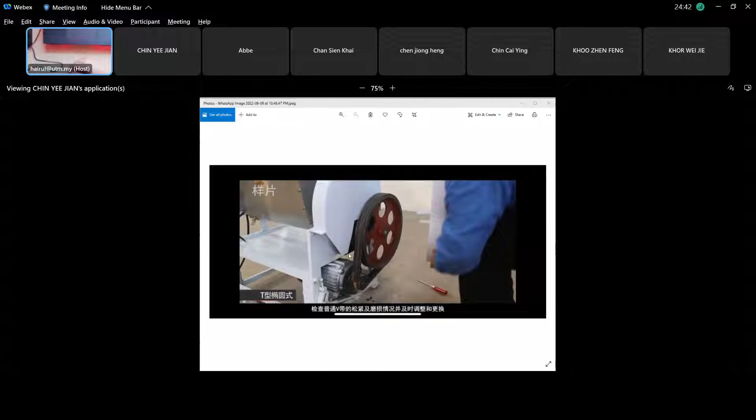Okay, if you look at this sample product in the market, anything from China, this one is normally a food mixer to make dough. So is this one a dough maker? Is this machine a mixing mixer? They are trying to make a dough-making machine. Yes, we found the dough mixer machine.

But there are many choices, since one does it like this, the other one just has 2 gears. So we think this is more suitable and maybe more economical and efficient, because they are cheaper compared to the 2-gear one, right?

Yeah, but be careful. Yeah, you are right. What you said is right.

But sometimes it depends on our normal design class. Look here, look here class. Can you see my live video? What you did, your background is right.

You study this part of your design process. First thing we have to make a background study, right? But sometimes can you create a situation - can you see my live video or not?

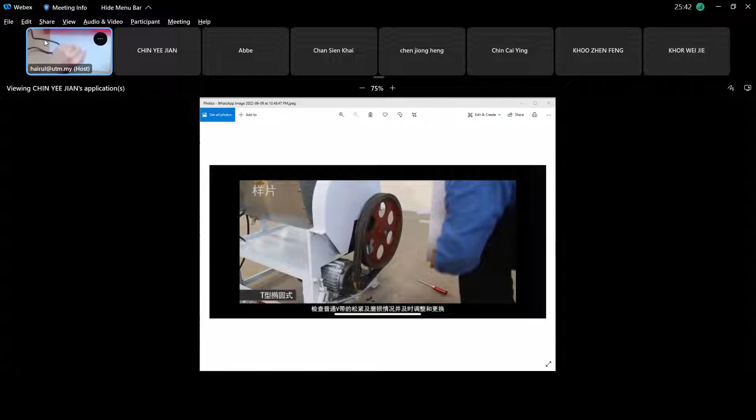Class, can you see my live video? Hello class. Yes, can see it. Okay, sometimes in a project you make a list.

Okay, you look through sample products in the market, but you don't know actually how much capacity it will carry. I'm not talking about power capacity, I'm talking about capacity of the production performance of the machine, in terms of the volume flow rate - the performance of this machine.

The performance of the machine is in terms of how much quantity of dough they will produce per minute, I'm not sure how they define it. Understand what I mean? The capacity of this machine - how much dough it can produce, how many liters, for example. If liquid you call it liter, if granular you can also call it liter, but if dough, between liquid and solid, is it measured in grams of dough or what?

So you need to be certain of the spec - the output speed, the performance of your machine, what we call the capacity in terms of volume per minute that you can produce. That is also quite important, so you can decide with your group, because you don't know how much the size of your container or mixer should be.

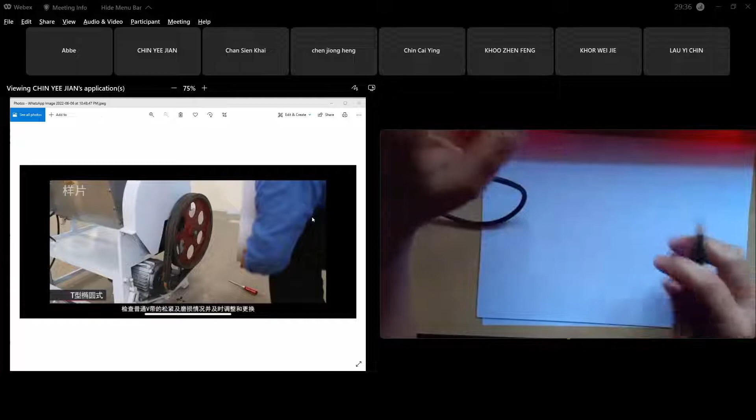So you need to be exact. It's good like that because I want you to look at it as an engineering consultant would. From there, you try to make - usually your customer, for example, let's say it's Nestle. Nestle wants you to do their food mixing machine for their production line.

For example, like Yijian, your case is a dough making machine. Your company is not necessarily - okay, I change it to something, a very famous baking company. One of their production lines, they want to make a donut. One of it, they need to make your dough.

Your dough will become, at the end, after your machine, one module. The next module of their production line is another process to make the donut. So your machine's job is just to produce dough, a quantity of dough.

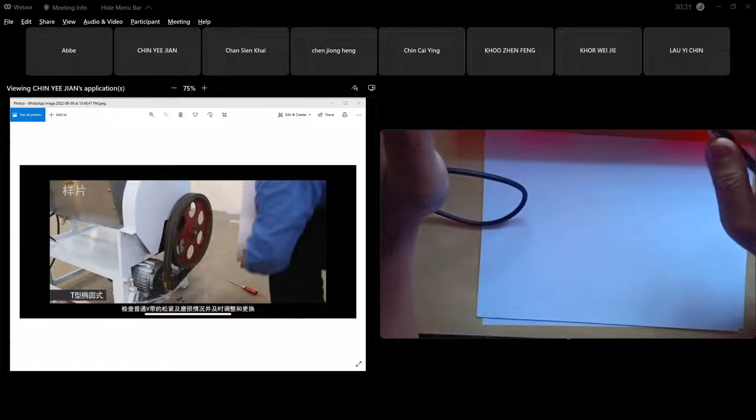Understand, Yijian, are you listening or not? I don't want you to do a lot of research, just a simple thing - I just want to create a scenario. Yijian, are you listening or not? Yes, doctor. Okay, for example, your production line is making a donut.

You need to identify: main dough for what? Dough can vary - dough for bread is different, dough for donut is different. Can you focus on one thing? Maybe your dough making machine, for example, they want to make - let's say we focus on donut.

Our dough machine does not produce the donut itself - our machine's output, as long as it becomes dough. So the amount of dough is enough to make their production. Okay, you create a kind of station.

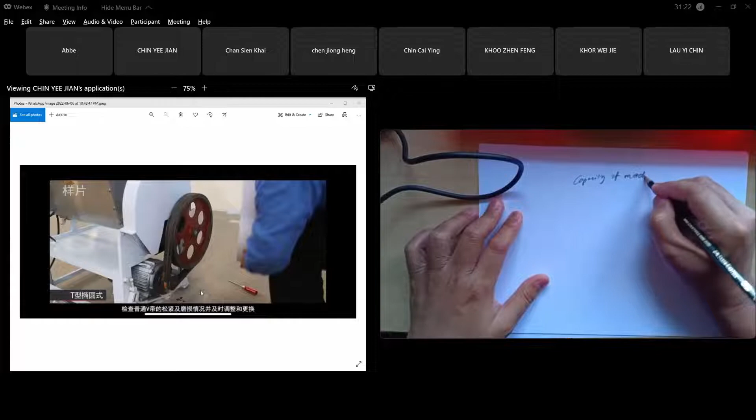So what my point is, your customer will ask you: okay, their production line, what is the capacity? Capacity of the volume, capacity of your machine, capacity called performance - performance of your machine. Performance is like when you design a sports car - performance is your speed, your fuel consumption. For this kind of machine, your capacity of performance is how much it can produce per minute.

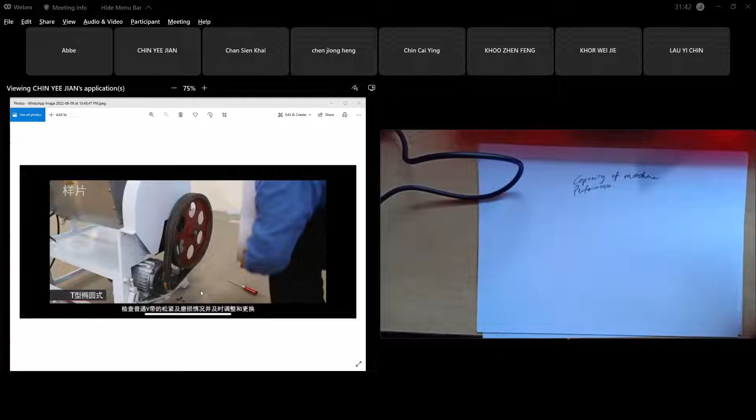So from there, you can identify the size of your machine. Then your customer will ask you, because there is their production line, they have their zone - what I explained to you guys is just to guide you. They have some kind of size limitation.

Because this is your machine - before your machine is the dough making, it's a food mixing machine. Dough making machine, food mixing - we consider it as category food mixing. Before your machine, they have another production line. They have production line A, production line B, and yours is C. C is dough making. Maybe before that is A.

Maybe do it manually, come to your place, then go to another place. And maybe they have a kind of size limitation for your machine too.

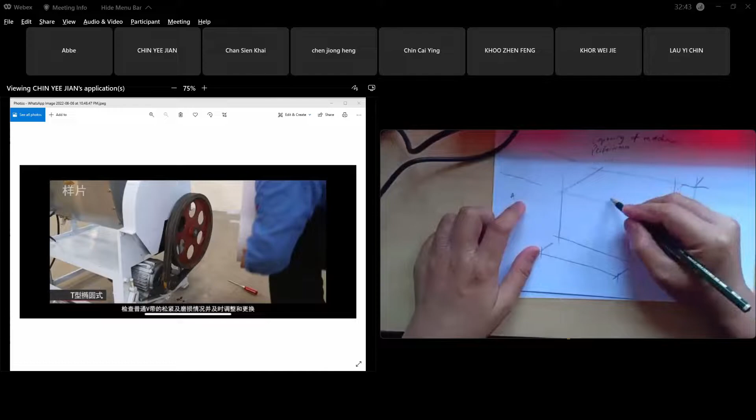Your client will ask you, okay, your machine will be mounted on their production line, and what's your occupying space? Limitation, size limitation. Occupying space is like this - this is the length, width, and height. So this will be the limitation of the size of your machine.

I'm not just making this up, I'm telling you to explain the real scenario when you do a design project. Occupying space - so can you, you and your group, Yijian, the other group also, identify what is the occupying space of yours.

Because later when you design, you simply say okay, I want to use V-belt and pulley, we don't want to use spur gears. But you haven't decided, you don't know what your machine is all about. You've decided too early about what is your power transmission. Hold on first - we want to know what type of machine.

Okay, for example Yijian, for example your client is a bakery company. So maybe they will give you signal based on their engineer there. The engineer will inform the engineer of that baking company - this is a big baking company, consult, you are engineering consultant, will do automation, design machine from there.

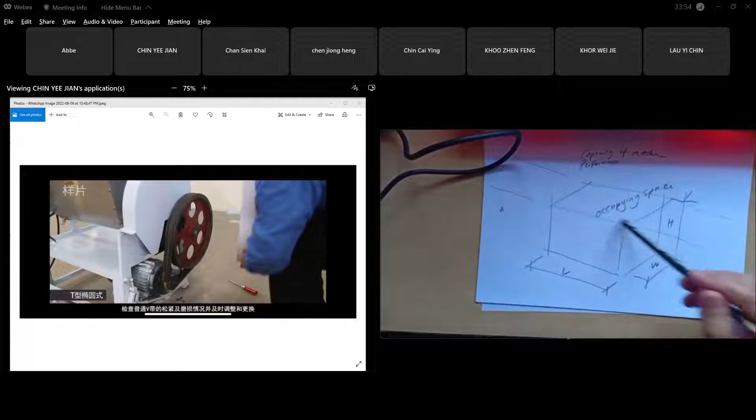So the engineer there will tell you the occupying space is not more than this, because they want to mount your machine into their production line. So my point is, can you guys - you look, you don't know, I don't know, we don't know the size. You can look from the internet about the overall size. To define the size, you just guess - maybe this one is 1.2 meter, who knows, and this one is 0.9 meter, this one is 1 meter height.

That is your total volume. So it's good like that. So you know your bounding box of your machine, to make sure that your machine will be not too small and not too big. So this is your limitation size. So you try to occupy this space. Understand that, class?

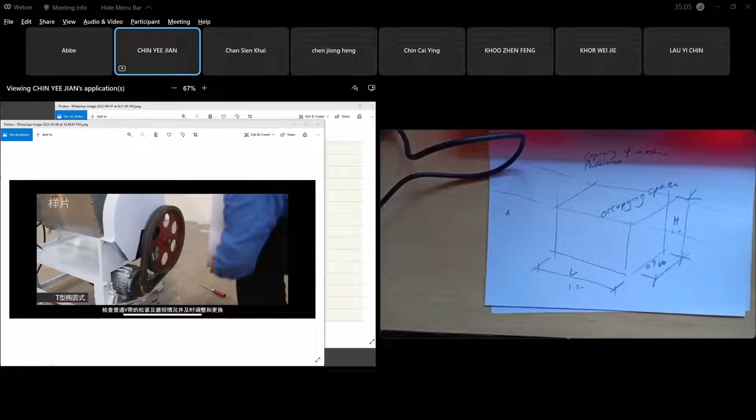Class, are you listening or not? Yes, Doctor. During Doctor's discussion, actually my group went to find some information about the dough machine running speed. We found that different liters have different mixing speeds. For example, if there's a 5 liter, then the beater process has 131 rpm, something like that, Doctor.

You have it, Doctor, special - can check here on the screen. I've already shared the screen. Here is the specification, and Doctor can see that. Wait, Doctor can see that during 5 liter, if the container is 5 liter, then the mixing speed is about 131.

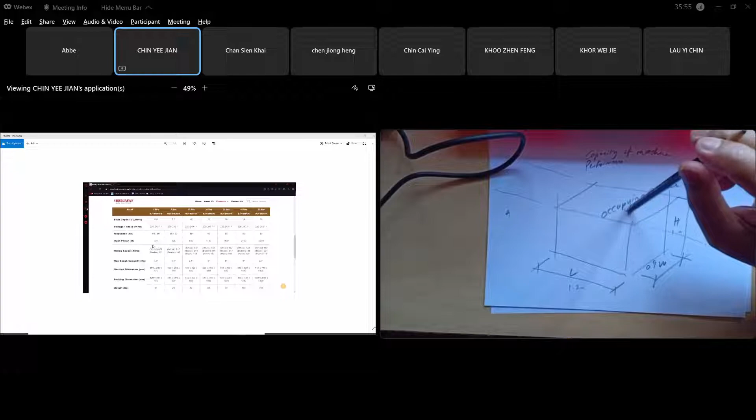We should focus on one only, because if we focus on two there's quite a problem. There's 152 for the whisk process and 131 for the beater process. I believe we need to use a lot of gears if you want to change the speed. So something like that, and the input power is 300 watts.

So maybe we will try to find on Alibaba to search the electronics. You have a lot of variations in terms of the model, right? So you need to focus on one. Which one do you want to go for, 5 liters?

Sorry, Doctor? Various means the whisk process - you have a lot of choices here, so you want to select one. My point is select, so focus on one. Okay, select one speed only.

Okay, but of course the frequency, something like that, we don't care, right? We only care about the input power and the mixing speed. And the bottom one is used for us to sketch, right? Something like that, Doctor.

Yeah, okay, right, so what about the size? Size actually, I think it's 5.5 liter. Maybe we choose this one, the 5 liter one, and then the machine dimension should be 350, 230, and 400. I think this is enough for the commercial product, because it's sure here.

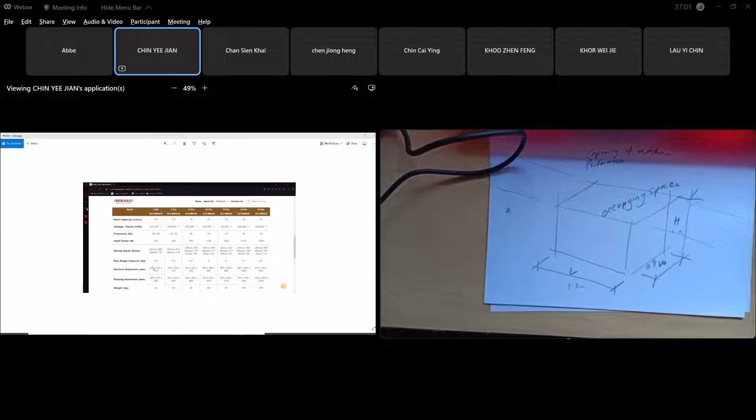It definitely means that his product is like this, right? So we just follow him and we got a reference, something like that. All right, okay.

Okay, yeah, you are right. What you said, okay, this is part of your research. Okay, this model is already in the market. Okay, this model, we have two categories. Okay, I understand you can do it like this also.

Okay, but sometimes in design consultant, we are looking at making research on the current product in the market for dough mixer machine. Dough mixer is there because they make it commercial. But what I'm explaining to you is not about commercial machine. What I explain to you is about more on your design, your custom design.

Sometimes industry is like that, because industry sometimes has automation in terms of production line. As a design consultant, I'm talking about you doing design consultant, you are a design consultant company. This kind of what you have learned from this course, you can apply when you, after you graduate, become an engineering consultant. You and your friend form a company. This part of your work is doing automation.

Okay, what I'm talking is more on custom design. Do you understand what I mean? What you do is right, okay, you look on the current. What I'm talking, sometimes we can create this question. I'm talking about the real thing.

But in production line, for industry, sometimes we go like industri kerepek - industri memproses kerepek ubi, contoh industri memproses jagung. These are the food products they sell in the market, kerepek ubi. Because they need machine, normally their workers do labor and manual process.

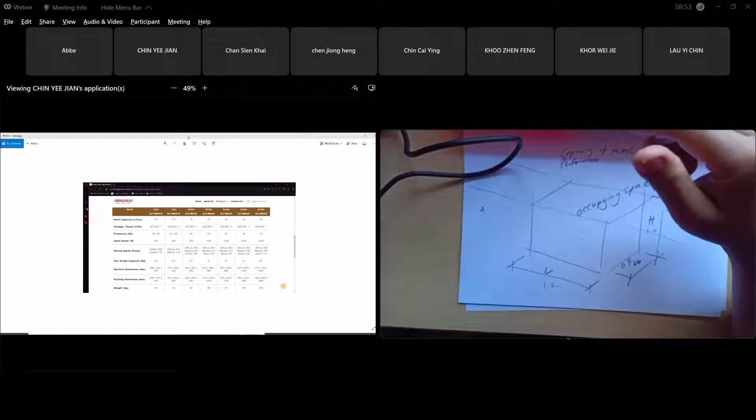They need labor. This kind of customer, this company, will hire a design consultant like you, like what I am explaining. They will explain to you, okay, your machine - sometimes they give you theirs, even big companies honestly, sometimes the machine you do is not based on what's already there. If it's in the market, we simply buy, we don't have to do this. We can simply buy, but what you did is good, you can do this as well. I didn't say I have no argument on what you explain, Ijan. What I'm talking is another story.

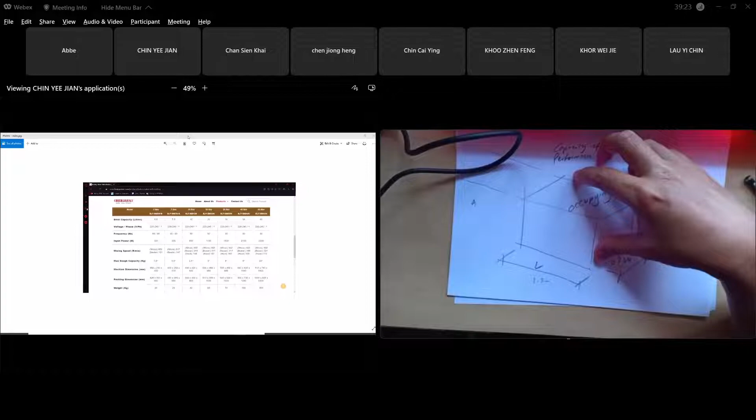So sometimes your customer will define, so your machine too will be a custom design. So your machine has to be your own build because you build your own power transmission. Okay, what you did is right, you look at what is existing there.

This company is commercial. They already make this product for food industry. So they sell their product, this dough mixer, to be mounted on. Any company wants to buy, food industry company wants to buy it, or even domestic.

So maybe in something like this, maybe we can follow the model because there's a 5 liter, 7 liter, 10 liter, and there is a mixing speed and input power. Maybe we can follow these three things. If we use 5 liter, then we use input power 300 watt, and the mixing speed is 131 run per minute. But the designing we base on our own scenario. Is it okay like that, Doctor?

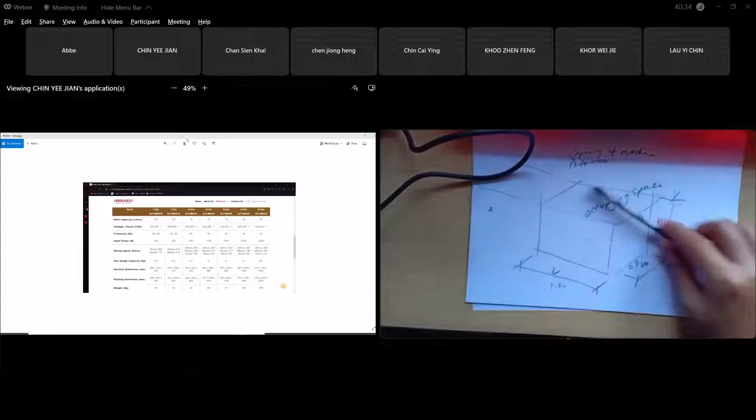Boleh, okay. Another thing I'm talking about, sometimes customer, when you do, the customer will give you what is the volume, that you have a limitation of space. So it means you have to make sure when you do your design - that's why I need to see all of the group's sketching, I want to see what is your overall size of your machine. That's the first thing, overall size of your machine.

So for the overall size of the machine, normally what we simply do is we need to make research. What you did, Ijan, is right, one of it. What another story I'm talking about, sometimes industry, customer requirement - this is what you got, your customer requirement. They'll ask you to do, okay, this machine about this size.

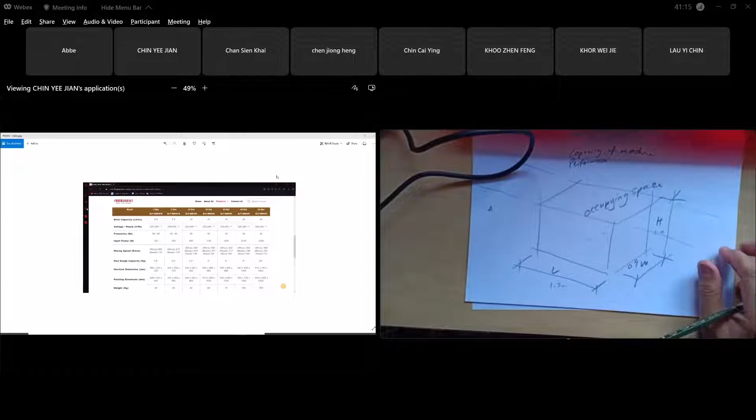Sometimes you have some issue, because if you just simply design a machine, sometimes is it suitable? Is it suitable at the place, at your client's, your customer's place to mount it, maybe based on their production line. Sometimes like this, we look at their production line, how it is. Sometimes they give you the limitation in terms of space. So this would be your first constraint that you need to follow.

There's a limitation that you need to obey. So my point is, you make a sketch. Once you know the overall size of your machine, like Yee Jian's example, okay, what you did is look at examples, or you guys can also look on the internet for what type of mixer.

For example, if other groups don't have this, don't follow the same. Different groups should go for different, make it interesting, food mixer. Say you want to make a beans mixing machine, beans, maybe coffee bean, I don't know, to make a product. So you make research on mixing, to do something, mix.

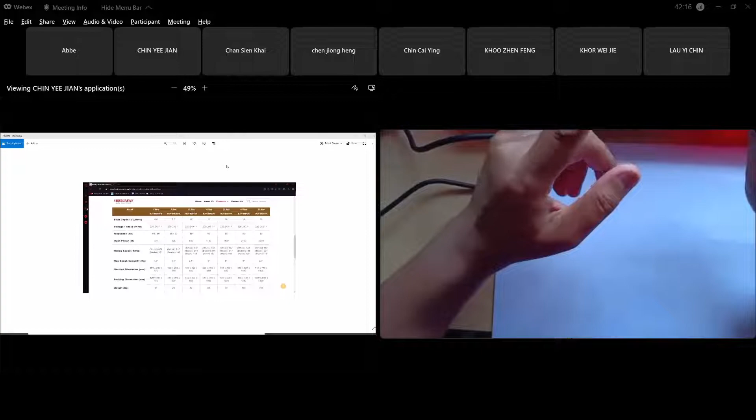Beans to make a powder. If you say beans become powder, that one is a grinding machine. You must be careful, whether it's grinding machine or food mixing. You need to justify it. I'm talking about food mixing machine.

So you have to decide what type of food mixing. First, you know the overall size of your machine, and then you will decide. For example, Yee Jian, yours is a dough mixer, right? Dough mixer. If you make research on the internet about the dough mixer,

they really need it to make a dough accurately at this speed. If less than this speed, it cannot form the dough properly, the mixture content will also affect the quality. It means the dough is too soft, or maybe too hard. Maybe the food technologists will signal to you, mention to you, you are the design consultant.

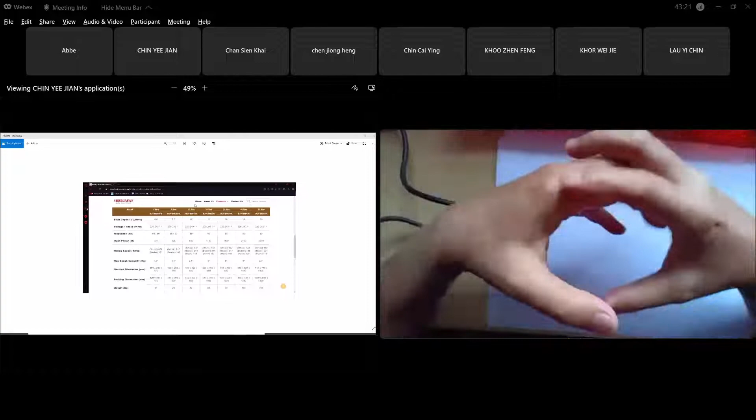The food technologists, not the engineer, talk about the speed. They say you only have to be fully automated. The engineer from that company will tell you, but you are the design consultant. The food technologists mention to you that the dough quality needs this speed. If too high or too low the speed, it will affect the dough quality. So you got to be careful.

Okay, it's quite fast because I'm just assuming about 60, so 131 RPM, so it means you have to make research, does it have to be accurate?

If you want to go for 5 liter, 5.5 liter, if you say it needs to be exactly 131, sometimes you can go to 130 and you need to justify it, because as I told you, if you want to remain accurate in terms of constant velocity, I'm talking about constant velocity, we go for spur gears.

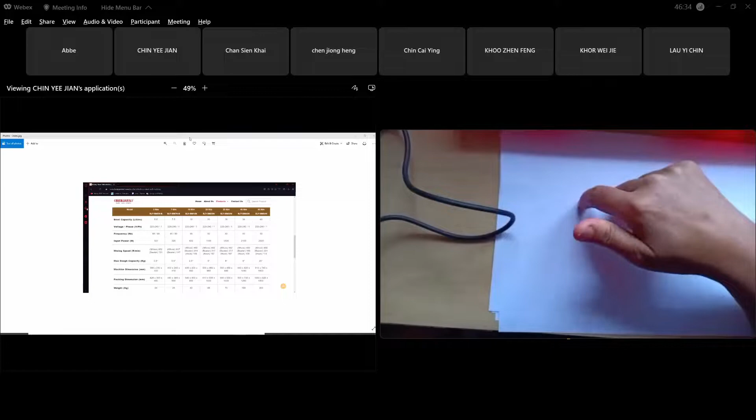Their dough making machine needs to be precise, that's why they use gears instead of pulley and belt. They justified it to me, the group explained to me because they did research that their dough mixer needs to produce this dough.

They create a station, that's good, something interesting. They discuss with the client, they make research, they don't simply talk. This dough has to be at this precise speed, exact speed, to be precise and have high efficiency. A precise machine has higher efficiency, so that's why they use spur gears. I agree, I'm convinced they're using gears.

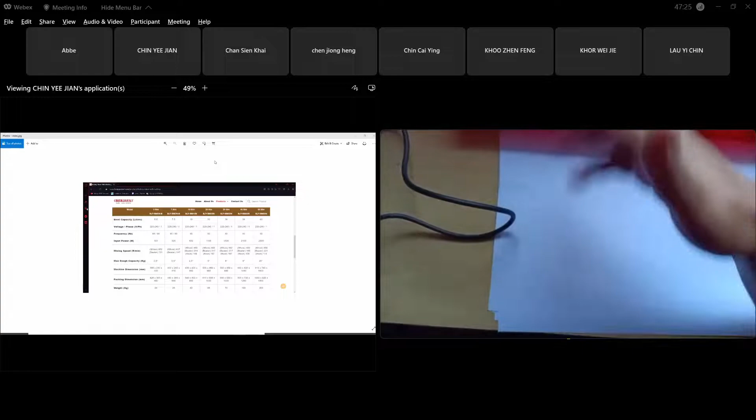They have 2-3 shafts because of the long center distance: input power from the motor, then another middle shaft, and the output shaft. So they're using spur gears, like you Yee Jian using pulley and belt. Okay, I have no argument on that. So you justify it, if your expectation is around roughly that, you justify it in your report.

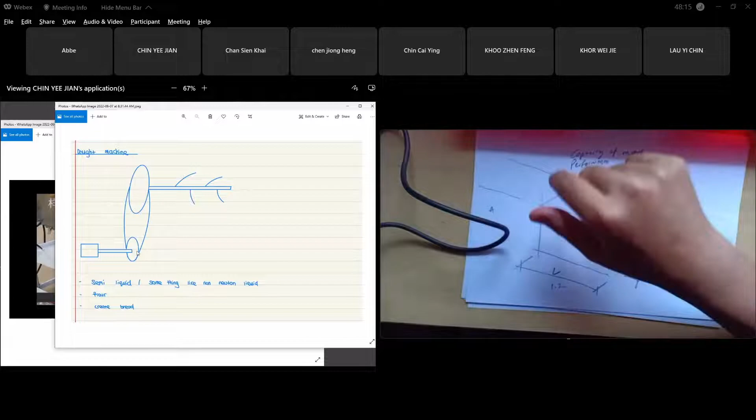Too fast to discuss the power and the location of the shaft. Too fast, hold on first. Just draw the dimensions inside. We need to determine, put some scenario inside first, and then follow up with discussing the DC motor per minute, shaft length, something like that.

First, the overall size of your machine, okay, number one. Number two, have you defined the speed? What was it just now? 131. Okay, 131 RPM, okay, you've discussed this with your group.

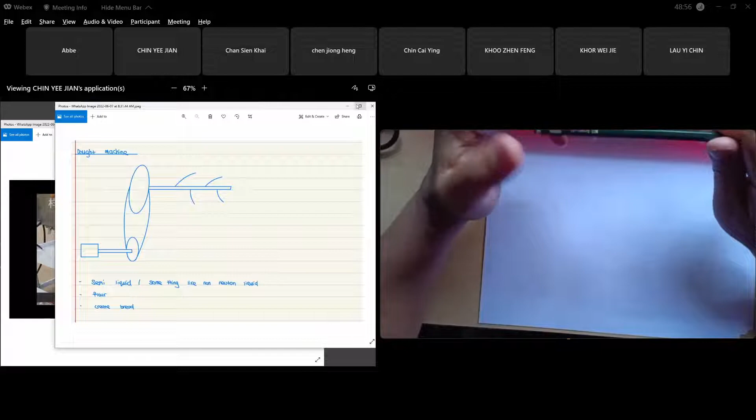Okay, what is the horsepower of your machine? That's the second step. What is the power of your machine? Is it normally electronic power, DC motor, something like that? The image you showed me just now, the table, a little bit confusing, what do I mean by that?

Power, input power, how much? 300 watt, okay, 300 watt, mixing speed is 131. So have you decided what motor you're going to use? We think maybe an electronic DC motor because there's only a single direction, no reverse or whatever.

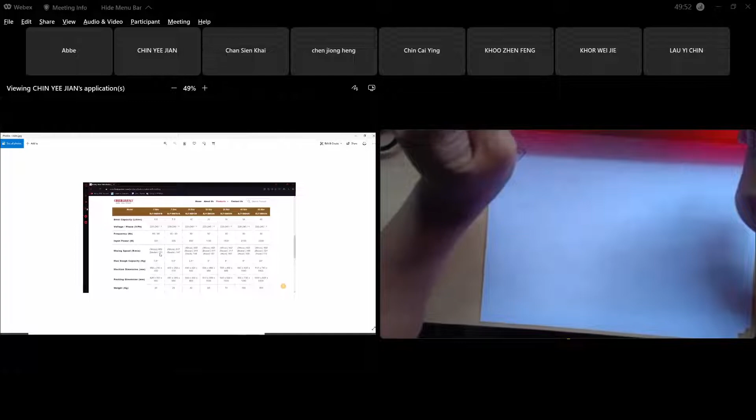So 300 watt, 300 watt motor, maybe. Okay, your speed is 131. Okay, your second step, you already know your overall size for your machine. You already have the image, the sample product, so this is already your occupying, overall size.

Okay, this machine, this step we need to do: you need to identify the zone of your machine. I think, if I'm not mistaken, we have two zones. One zone is the power unit, including your power transmission. The other zone is the mixing unit, that's the output of your machine. Right, class? Yeah, total.

Okay, you decide, sometimes for the power unit you make a block like this. Okay, this will be a block for your power unit, right? Okay, total, I'm talking about this as one way to do it. Better we go step by step, rather than straight focusing on the shaft you want first, then we design the layout of our shaft. So this will be your power unit, your power transmission unit, where the location of your motor and your shaft or pulley or belt or spur gears is. Understand what I mean?

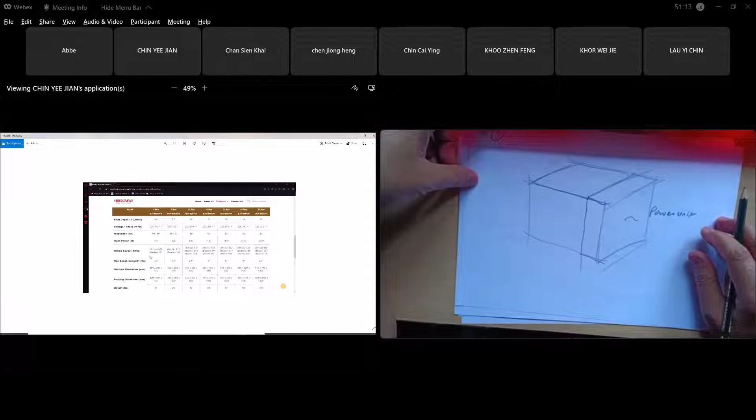Class, are you listening or not? Yes. So this one will be mixing unit where? You want below mixing unit or top mixing unit? Your mixer, where is it?

This is one way, the way I would do it with my group if I do it. This will be mixer unit, mixing unit, mixer unit is this zone, because we have a lot of machines. Of course, about this, you look at existing products.

That's it, so why do we need to discuss already there in the image, right? Now I'm talking, you don't have any idea at all. You want to build your own custom design, so you discuss, understand that?

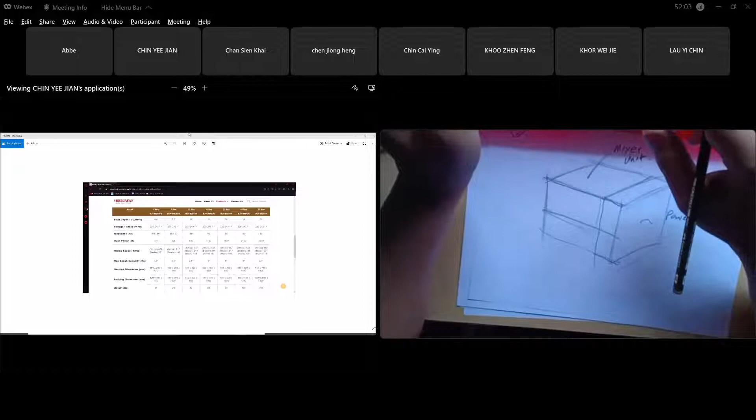About this, okay, you look need on existing product, that's a shortcut you know. Of course it will be. Sometimes when you want to make a food mixer, sometimes it's your own design, so you need to discuss. Of course, if we look at the image you just shared, it's like this.

Mixer unit, of course, here. So power unit, but you need to plan too. Rather than going straight to where the shafts are, don't focus on the inside first. We focus on the overall first, the overall machine, the layout of our machine, understand? So this will be power unit.

Our transmission unit, sorry, it has three parts guys. One, transmission unit, sorry, my mistake, this is my way, my opinion guys, my opinion. One more, we have power.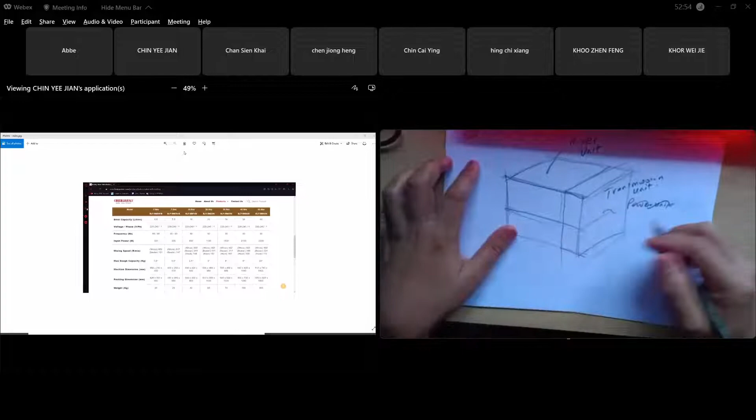Power unit, either you want to use motor or diesel engine, or engine, diesel or petrol, or do you want to use motor? That's how you do things. Or maybe you want to use solar power? Who knows, solar power. Nowadays we save energy, I don't depend on your machine.

I'm talking, power unit, where is the location of power? Power unit is the motor location. Transmission unit is your power unit, where is the location of your transmission unit? Number 3, what your machine will do.

Okay, we are mixer unit because we are a mixing machine, right? You design the layout, understand? You know what I'm talking about? The block location of this. Understand, class? Yes, it's clear.

But it's okay, you look at the image, everybody's talking, like before I gave my student a concrete mixer, of course they know, motor or not depends too, sometimes your concrete mixer has to be a special design, different, no, one of it you definitely look at the standard there in the market. But when you do consultancy, you build your automation machine like this, sometimes we're not buying standard machine, because in the market they sell their product like you showed me.

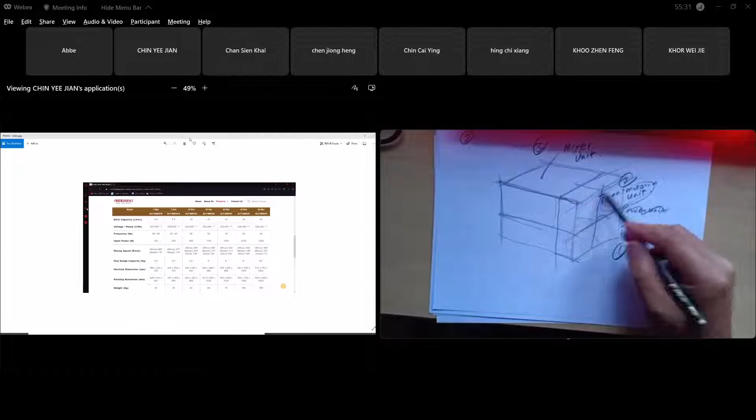So this thing you discuss, what is the location of your motor, what is the location of your power transmission, first power unit, okay, you use 300 watt, so where is the location of your motor, and where is your transmission unit, to transmit that power, how you design the layout, the location, and also the occupying zone, where is the zone, and also what is the location, your mixer unit, your machine will do.

First we need to arrange the dimension to the mixing and the power supply part. I don't want you to draw this block, I'm explaining to you the step procedure. So then only, okay, after that first we know the size, right, the size, length, rod.

As the other group mentioned, in case you don't have any reference for your design, this is how we do it. Sometimes when you search the internet, there's already a product in the market, and you might think why not just follow that.

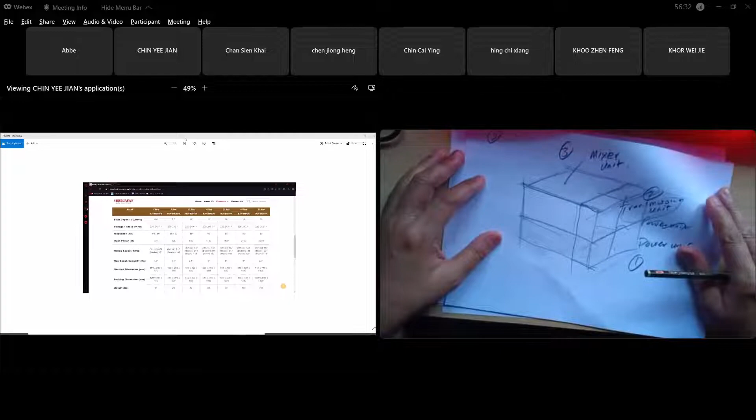But sometimes it's your custom design, so you decide the location of your power unit, your transmission unit, and your mixer unit. Then you make a detailed sketch. You don't need to provide me this block, just the procedure, then you sketch it. You sketch your container, based on that, after you identify the zone, from there you sketch.

I just made a shortcut here. So this one will be the shaft. What I need to see is this thing only, all groups. I just need to see this, not that. Not this thing, you don't need to show me. This is the step.

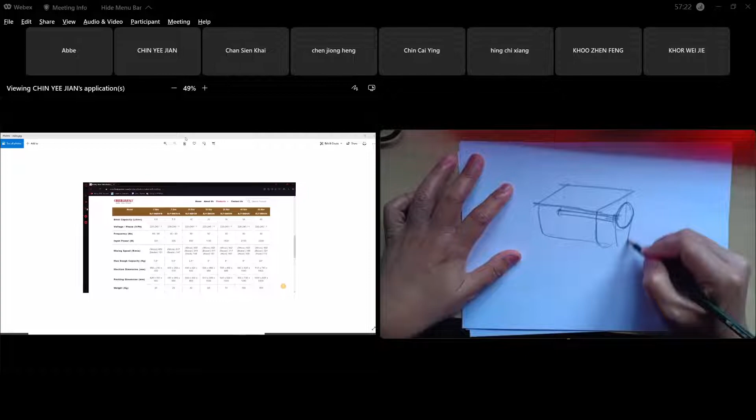This is the thing I need to see. You make a proper sketch. It doesn't need to be so beautiful, as long as your sketch can be understood. You have a shaft here, and you have a pulley here. Okay, you already know how to use this, so from there we know. Make sure that you follow the overall size we have.

From here you can sketch, because we are designing like a frame of the machine. We want to make sure that when you design, you just focus on the machine component: the shaft, the pulley and belt, and the shaft of the blade. That's all, this is our machine.

So your machine is just a schematic diagram. What is actually your machine? You just design and sketch only the working mechanism. So what supports the shaft? The shaft is mounted on a bearing. We have two bearings. So what is the bearing mounted on?

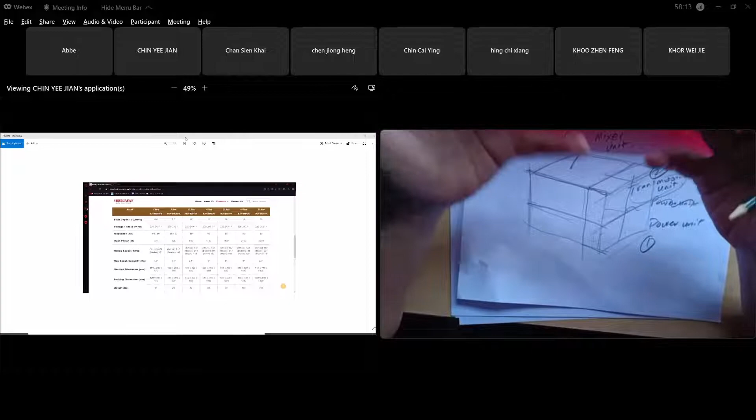The bearing is mounted on what? Everything is not floating in the air, right? Understand that, class?

Like the sketch you showed earlier, everything is just a schematic diagram. I need to see that exact thing. Your shaft, for example, you design like this. You decide where is your motor location. Your motor location is here.

Your motor has a shaft in it, but the shaft of the motor is so short. What horsepower did you want to use? A 300 watt motor - look at one from Alibaba. Look at the size of that motor, take the size. Basically they have a frame, so what is their shaft size?

Sometimes a 300 watt motor that you get from Alibaba has a shaft that is too short, so you cannot even mount your pulley there. So your motor has to be connected. That's why you need to sketch this.

Guys, are you watching me? Are you listening or not, class? Class? Yes, okay.

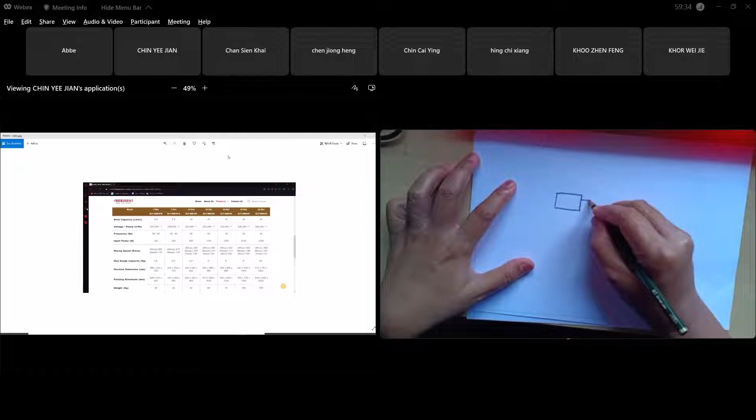Okay, this is a motor you get. You make a sketch, first a schematic sketch like this. What is the length of that motor? The motor actually, if you want to mount your pulley, the shaft from the motor shaft, they don't have enough length.

It's too short, sometimes you need to attach something, so it means you need to attach. This will be your shaft A, a short shaft. That will be shaft A, where you mount this will be your pulley. So you have to make this kind of sketching, this is what I need to see.

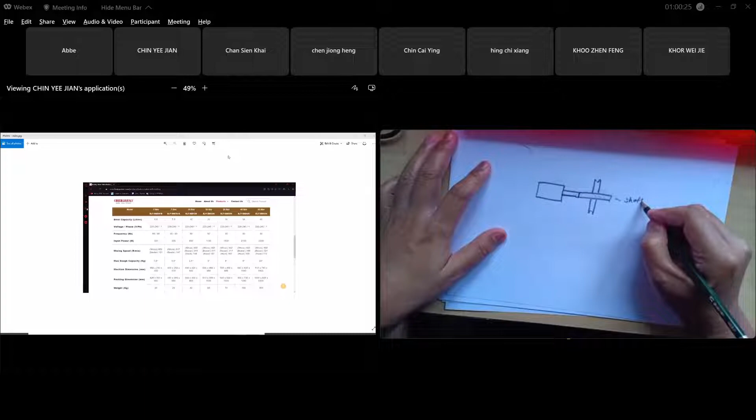So this motor is attached to this shaft. How do we attach this one? The motor shaft will drive this shaft A. This will be your shaft A. And you must have bearings here to support shaft A. The bearing is somewhere here, not there.

So how do we connect the motor shaft to shaft A? What component do we use to attach the motor shaft to shaft A? So you design - do you have two bearings? This pulley, how do you connect this thing? So it is connected.

Normally for the motor, if I zoom in bigger on this part, this is the motor shaft. The motor shaft has steps, and there's a chamfer at the end - I'm just making a shortcut here. This is the part of the motor shaft, so you have a coupler.

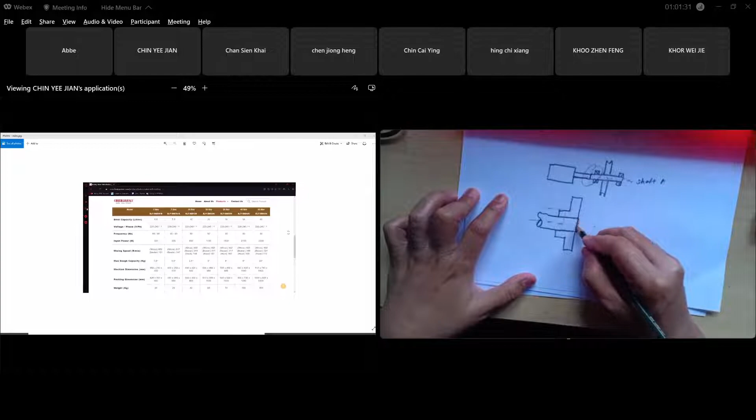Normally they will do that. Coupler, then this will be jointed, then it will drive the motor shaft. This is your shaft A, the center line of your shaft. A coupler, you know coupler, guys?

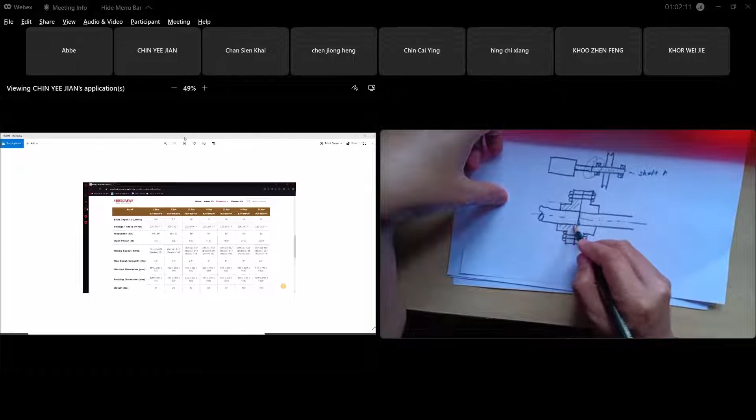So the coupler will drive the motor rotated, it will drive the motor shaft. So you don't have to make engineering drawing guys, for you, you don't have time. Just I need some sketching, okay you do some sketch.

So just to explain to you the location of your motor, so this will be your shaft. Now this is isometric drawing, so this will be your shaft A. So you check out, this one will be the bearing, and this one will be the pulley. This one also the bearing, and the pulley will drive you punya...

Like this one, Doctor?

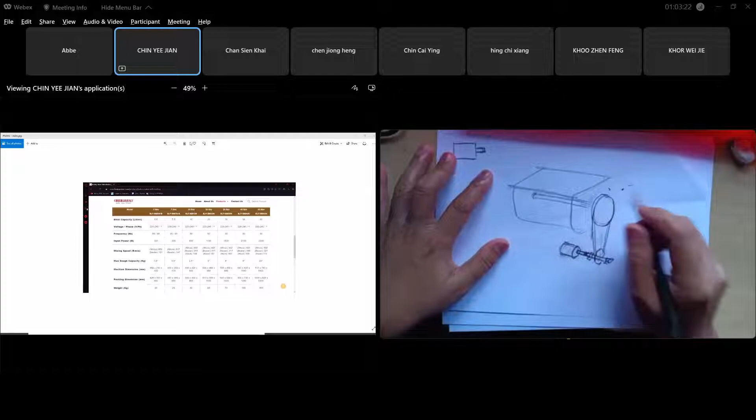Yeah, don't have to be so beautiful, don't have to be, as long as I can understand your sketching.

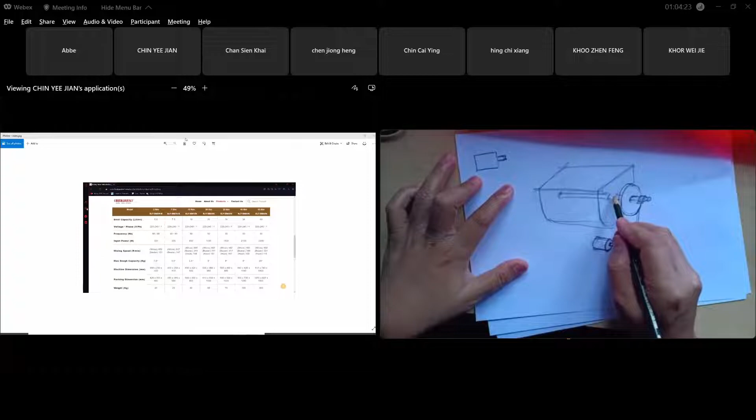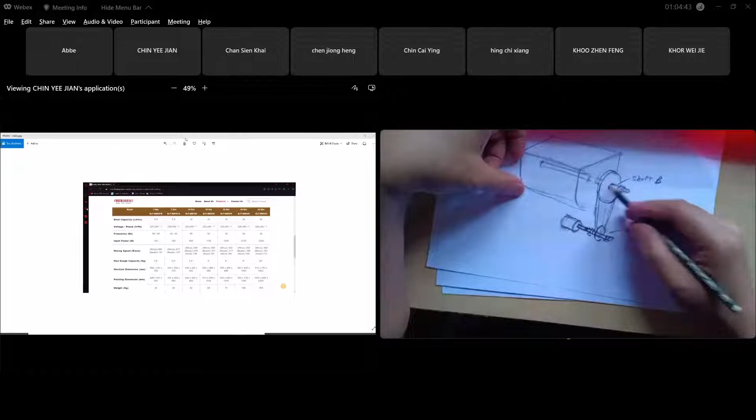Okay, what about, okay, we have shaft A, this is shaft A. Now we have shaft B, okay? Okay, later if you are 3 groups of you, group student A will do analysis on shaft A from motor shaft A and pulley and belt, and student B will do shaft B, pulley and belt already done by student A. Student B will do analysis on shaft B, fatigue analysis, also bearing.

We have 2 bearings, let's say that we have 2 bearings here. What's the length of that shaft B? And okay, another shaft will be shaft C. Shaft C, the one that connected the shaft C, special design. Shaft C to the one that have blade.

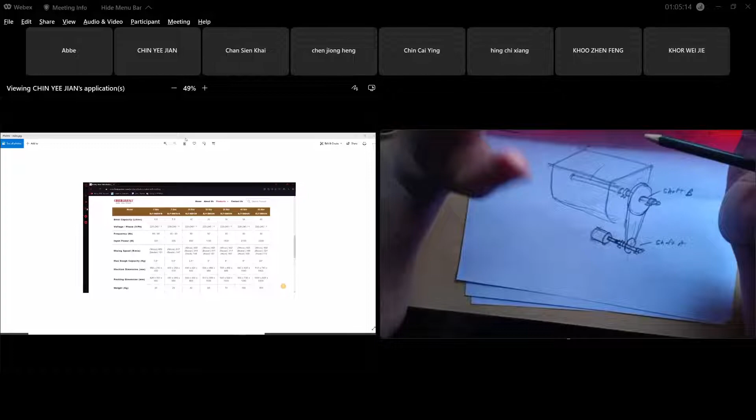Okay, for your Yee Jian, your dough mixing machine, dough maker, okay dough maker, what type of blade they are using, so you need to focus. Okay, this will be your shaft C. Shaft C, okay shaft C is, okay, is really shaft B is one solid...

One solid shaft, yeah, no. Actually shaft B is different. Shaft B will drive the shaft C, because shaft B we use a standard shaft, if I'm not mistaken, so it will drive the shaft C, because shaft C is a special shaft. Shaft C is where you welded, it's kind of like shaft, it's a mixer. So what type for dough mixer?

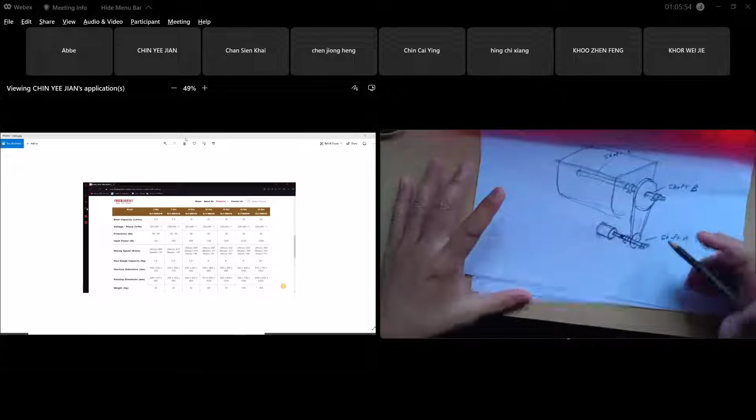We have a lot of mixers. So I need to see this guy because, okay, this bearing, okay, before I go to that, shaft A, okay, this motor is still floating in the air. The motor is still floating in the air, so you need to design.

So because first it's good, you have this zone, you know, you plan, you make the zone where you want to mount your motor. Your motor will be mounted on the frame. So what is the frame of, how you design the frame? So this is a frame, you design the frame has also the leg to support all your machine, because everything is not floating, must be on something.

Okay, this bearing also has to make sense. This bearing, okay, we have the bearing housing. The bearing is mounted on what? The shaft is supported by 2 bearings, but the bearing is mounted on what?

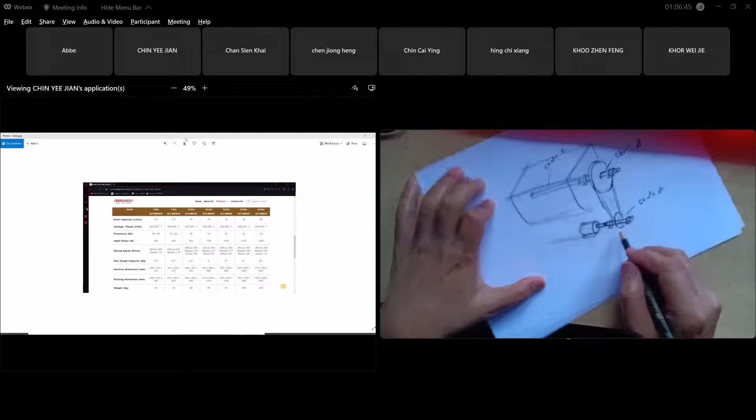On the frame. So what is the frame? For example, how do you design the frame? Design your frame, box section or what? Design the frame where the bearing is mounted on, and this one becomes the frame for your motor.

So this is the thing I need to see, the structure of your machine. Don't just give me the shaft, sir. This is not a machine, that's just like your assignment. Remember your assignment, they give you a free body diagram, that's all. We need to see the overall machine. Understand, class? You understand what I'm talking about, class?

Class, you understand? Yee Jian, show me the image of that again. I want to look at this frame. One moment.

No, don't show like this. This is not it yet. Is this it? I'm afraid of how you show it. Not like that, yeah, this one. Can you zoom in? Zoom out. Yes, that's the picture.

I need to see the frame. You see it? They have a frame for the platform. They have a platform where you mount your motor and the shaft is there, like yours, okay, like yours is like this. About that diagram, the image photo you showed is not clear, right? We cannot exactly tell, so you have to make a sketch of this, the location of the shaft.

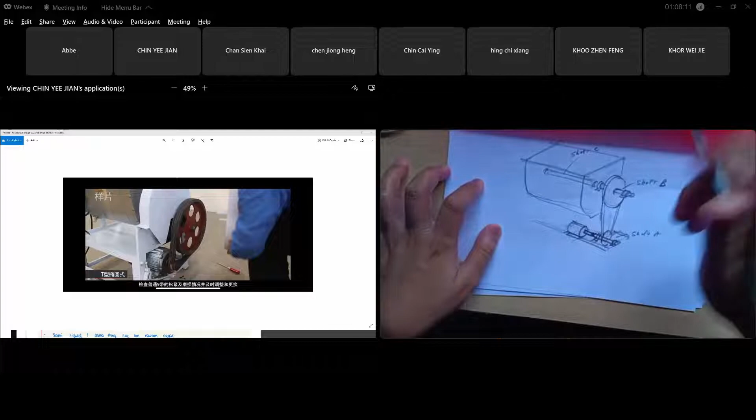And you don't need a casing, guys. Like this is for commercial purpose casing, but for your case it's just to look aesthetic, look nice. You have a casing to, as long as you have the structure to support it. Where's the motor mounted on? You have a platform, and this is the container.

But let me show you. Hold on a second, the internet is acting up. Can you see my browser? Maybe I need to stop the sharing first. Okay, alright, do it. Can you see my browser? Can you, yes.

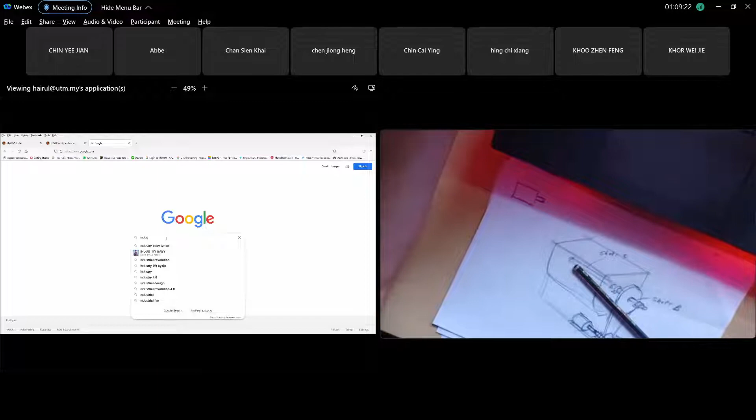We're going industrial. If you search food mixing machine, it goes for domestic products like home bakery, the flour mixer for kitchen products, right? Industrial, we go for industrial food machine. For example, to see the frame, I want to show you.

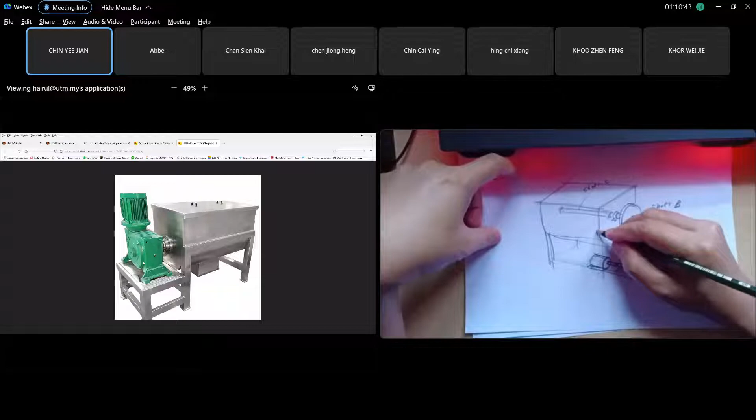Three of you normally. Three, okay, 3 of you have to make an effort, this is your project, not mine, sorry. You have to do research on that. For the mixer, what type is it, what is shaft C there. If yours, okay this is shaft C. Of course we have the shaft because shaft B has to drive shaft C.

Shaft C, can you see my sketch? Shaft C, the most simple mixer is just a stick here, a tiny shaft stick here. This is the most simple mixer. Agree, guys? Class? Yes or no? This is the most simple mixing unit.

Mixing shaft. So you have the basic, your skeleton. Your bone is your shaft and you have a stick, kind like a cylinder, whatever we call it. There are many, maybe you have a vertical form too.

Macam ni lah, depend how you design. This is the most simple mixer. But be careful guys, for your mixing be careful. They have a lot of mixer types, that's why you have to make an effort for dough.

What type, I'm not doing this project, so I need to see you to be independent. I want to see your effort. You justify in your report why you use this mixer, for dough mixer how it is. You've done the research already. Ijan, dough mixer macam mana?

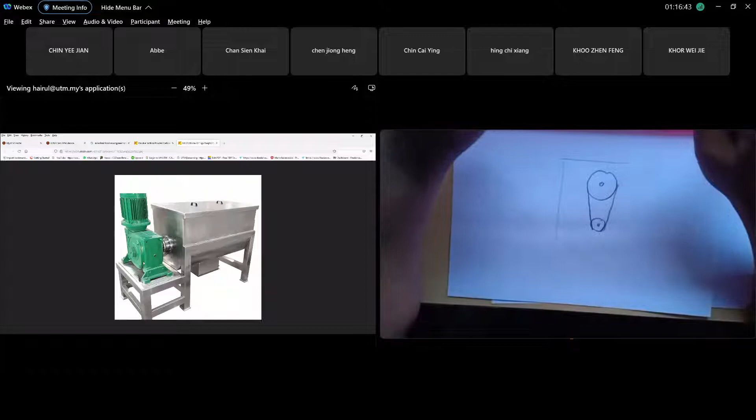Okay, then after you have this dimension, only then can you plan. You make a sketch from the side view. This is the location of the pulley, and this is our small pulley. You make some schematic diagram, this is kind of by hand, you don't have to draw in SolidWorks. Okay, another section, one of the groups said they want to do it in SolidWorks. I said okay, if you can do SolidWorks it's not compulsory, but you can.

The advantage is if you have the overall machine, you can plan it by doing the model first. It's good, but it's not compulsory, it may be too much for you.

Shaft diameter later on, remember shaft A, shaft B, shaft C. First decide the length of the shaft and where is the location. What is the location for shaft B? And the length of shaft C depends on the size of your container.

Give detail, plan, and dimension the size, because if you know the size of your container, then you know the length of your shaft. The width of your container tells you where to position your pulley. So locate all the coordinates of your components, pulley, small and big, shaft A, shaft B, and where the bearing is mounted.

What is the distance of the bearing? Once you have all the detailed dimensions, you can do it by hand, not necessarily making an engineering drawing. Engineering drawing is the final output, the one you learned in year 1. Remember, you have assembly drawing, exploded drawing, and detail drawing, all common. That is meant for fabrication.

Engineering drawing is the last thing after you've done the design. You do component design, calculation, fatigue analysis to ensure the shaft diameter is safe. You also select the bearing. You know the size of the shaft, location, material, everything already calculated. Engineering calculation is right, like what you are doing in your project now. Later, once the material is selected, including the container material, only then do you produce the engineering drawing.

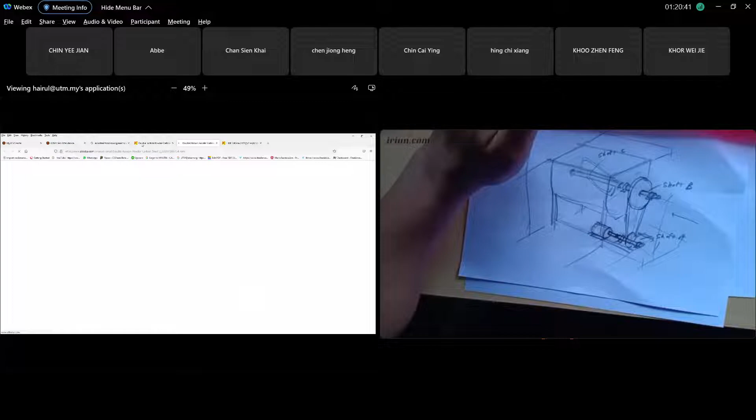Sorry, what? Auger blender, what is auger? In English, auger is what? I'm not sure either. Is it for food? I think it's a food industry type. Kind of a food auger blender, mixer. So this one is an auger blender, I don't know, is it powder mode or what?

Okay, we don't know what's inside the image, what you see. We cannot see what's inside there. So I believe it will be the shaft.

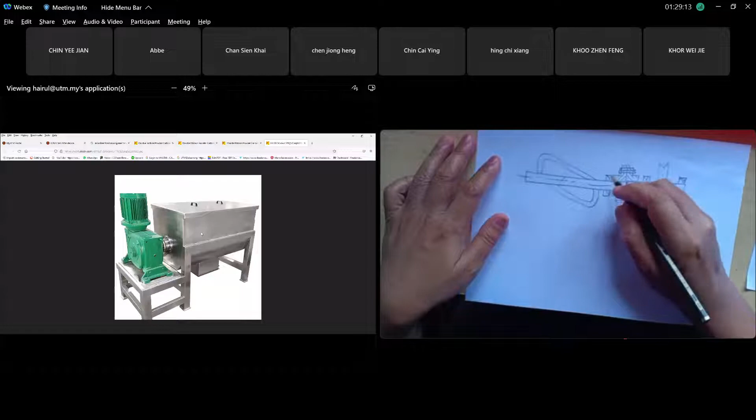This is my opinion, you have bearing. So where is the location of your bearing? And also at the end here, at the wall again, or the wall of this container, they have a hole. That is the location of bearing. So your bearing is at the end.

Design. Okay, shaft C, later you make a schematic free-body diagram of the shaft C. Shaft C, so this will be your bearing. Okay, this one will be your blade. Okay, will be your blade, and this one, another bearing here. At the end here, and it's connected together. Okay, this is shaft C.

So student shaft C can focus on doing analysis on this. You've defined all the locations, all this dimension. And also the dimension of the blade, you also need to know. What is the length here, height here, okay?

What is the curve to there? Yours is like your blade. Different groups may have different kinds of blades for mixing. Maybe the simplest one is just a stick like that.

Another question I need to find out. After you have done this, give me your sketches. If I'm satisfied with your sketching and I approve it, then you can proceed to your engineering analysis. You already have this kind of sketching. If you want to do analysis, guys, are you listening?

Boleh sikit? Kita sampai pukul berapa? Boleh just continue, guys, boleh. Ada masa banyak lagi tak boleh. Kita don't have class on Thursday, tak ada.

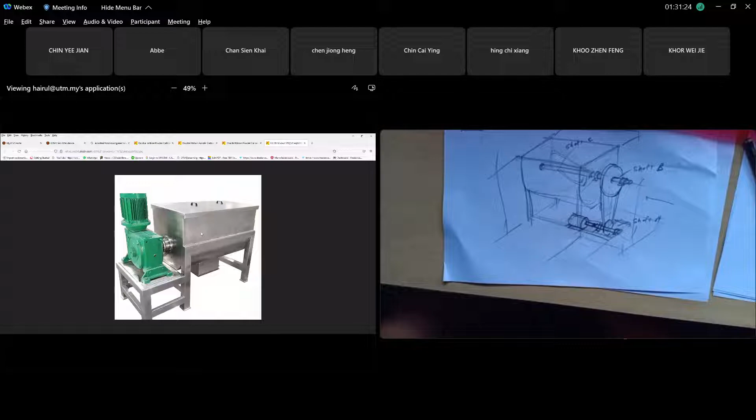Bila you dah know the location, the length of your shaft, semua shaft length you dah define kan? Before analysis, the length of the shaft, the location of your bearing, location of your pulley, location of your spur gears dah define. Faham tak kelas? For shaft A, understand tak?

If we want to define the diameter of the shaft, we need to find some justification or resource, or what? As I told you, diameter of the shaft, hold on, itu later on. Diameter of shaft will be affected by your bearing selection. Okay, you want to start your calculation.

You have done this, macam I want to expect you. This week I want you to focus on this. For analysis, hold on, tapi I just give you guide for analysis. For analysis, after you have done that, analysis begins at what?

At the motor, from shaft A. For example, you are using pulley and belt. Motor you are using 330 watt, right? 330 watt, and the motor RPM is berapa?

So this one will be your shaft A, right? And this will be your pulley, and you have a bigger pulley here. Remember in your assignment, okay.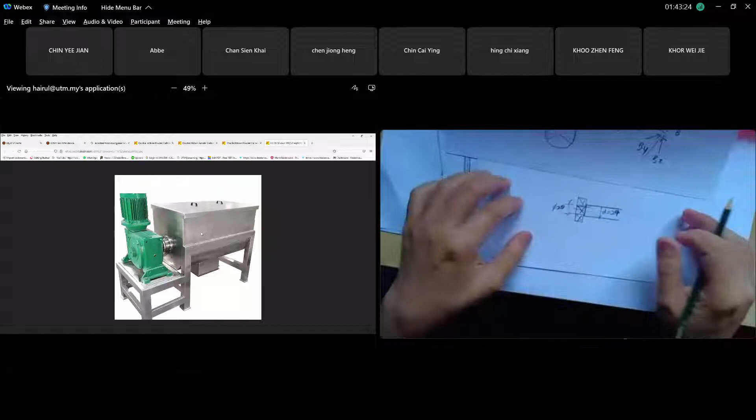Yes doctor. So bearing, you design your bearing. Okay, this is bearing O. Bearing O, what about bearing B? Bearing B, be careful, maybe the reaction, I believe it is symmetrical.

If symmetrical, your case is the same. Because symmetrical, the length, it depends. If symmetrical, it's the same, or you calculate also B. What is reaction at B? Procedure: CREQ, take table 14.2, the nearest maximum, go for extra light, light, medium.

From there, you can know the bore, sub-bore diameter. Then you go for table 14.1 to get the bearing code size. So you decide, using for B also light series. So be careful, I just assume that it's symmetrical.

If symmetrical, it's the same. If not symmetrical, maybe the bore is different. It depends, if to me this is the same, if the same distance. If the distance is not the same, be careful. If the same distance, it means your O and B is the same bearing, you use the same bearing. If not, it depends on the layout.

Because okay, so you put the bearing here. Then you design this, the diameter of the shaft is 24. Then you make this one with a step, because the bore of the pulley of the belt, they can custom design.

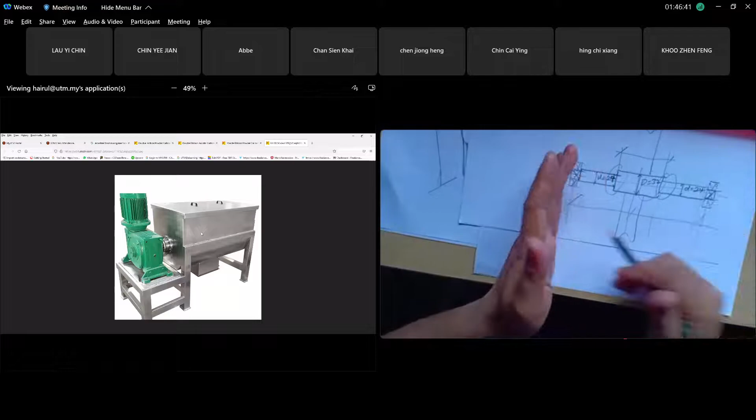For this one, if it's like this with your pulley and belt, be careful - you have an angle to consider, an XY plane and an XZ plane direction. So remember for shaft analysis, you do the XY plane free body diagram, shear diagram, moment diagram, then shaft fatigue analysis with the moment diagram, shear diagram for the XZ plane.

Be careful - the pulley has a beta angle, so in the XY plane we have cos sin beta. You must know about that, because it has an angle, T1 and T2 are not the same. Later in the XZ plane you'll have sin theta, cos theta, because the angle makes it not straight. Before this, your pulley and belt was just straight, parallel - but this one has an angle beta, which you can calculate based on your angle of wrap.

Then you do this. Okay, it's alright, just explaining to you guys. But for this week, no - this one comes later, you hold on. Because you cannot prepare this thing first if you don't have the other part done.

The dimensioning, that's all I said earlier. Understand, class? So total for this week, we focus on drawing the schematic diagram like this, the overall dimension, and then we draw all the design positions - something like power, work positions, where the mixing machine is positioned, what we want to design, and what is the mixing shaft. Then for next week we go to engineering calculation.

Okay, but next week we learn bolt and welding, that's a different story. Yeah, but you have this. You don't depend only on the content of the syllabus.

Tutor wants to ask - this major project, when do we need to submit it, until when is the due date? At the end of study week. Is there a study week this semester? I think it's week 6 or 7, right?

Normally there isn't one - it's during the early period of your final exam. Or maybe because this semester we have internship, our final exam will be a little earlier, Doctor. But it's okay, still during your final exam. Can it work? Yes, it can.

Actually the test 2 weightage for this subject is 30. So I think it's okay, Doctor.

The report's main content is just your analysis, but you have a few chapters. I'll give you the format a little later, you need to follow that format. It doesn't require a lot of long writing or chapters - just a few, like introduction, a little bit. Like I mentioned, you need some other chapters explaining why you came up with this machine, why you use a spur gear instead of V-belt.

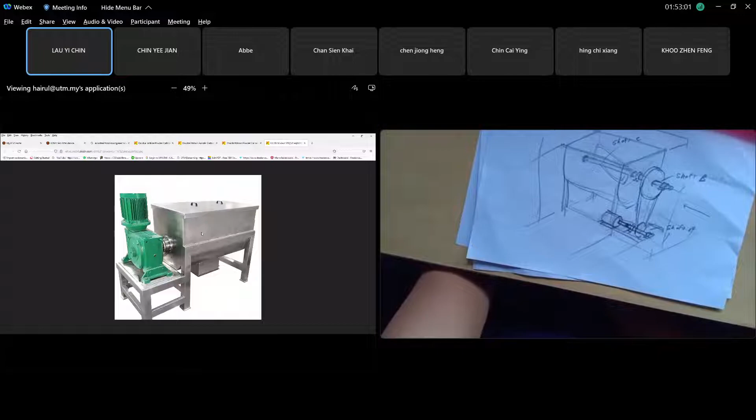So this is our sketching, can Doctor see it? We chose the ribbon blender. Our product, the food we mix, is instant breakfast cereal. This is our rough sketching, we haven't sketched the frame that Doctor mentioned just now.

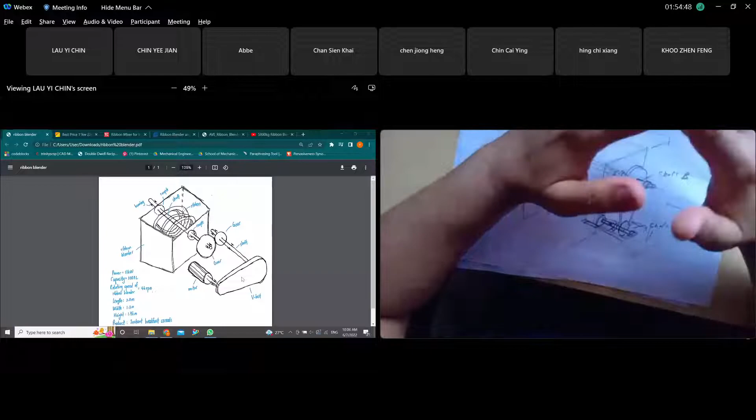Is the casing a box, or should it have some curve to it? I see it as just a box shape. But since your ribbon blender's overall side view is circular, like the ribbon itself is circular, why must your casing be a box? It should instead follow the profile of your blender. That's how you define your casing shape, understand?

Modify it back so it looks like this. Your ribbon, looking from the side view, is also a circle, just spiral, it's a spiral shape. So it should be like this - the container, the casing for your blender should be like this, not a box. I just did the rough sketching only.

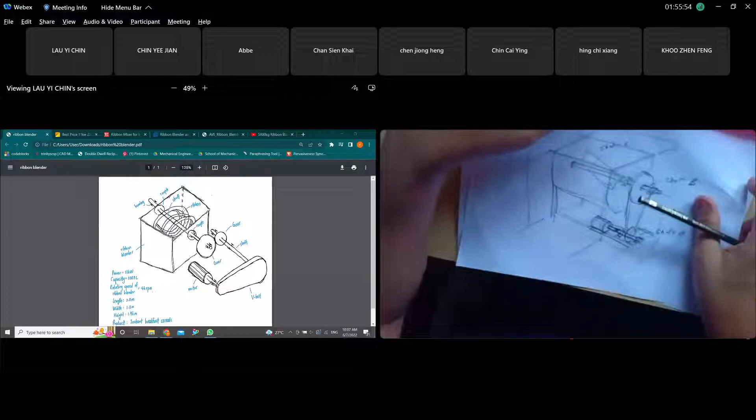Okay, this is your sketching, you have all these components. You need to do what I asked you to do: first, identify the zones - power unit, transmission unit, and so on. Can you redo this again, following exactly what I asked? Then put the exact location and the overall size.

What is the size of the container for your blender? Is blender considered mixing? Blender is a mixing blender - for what is it? Which blender again? Cereal ribbon blender, to make the instant breakfast cereals.

Is this product already in the market? Hold on a moment... Yes, I found a seller selling this machine. Okay, so let me ask, what is the significance of this product?

Significant - what do you mean, sorry to ask. We just put the cereal in the bowl and pour milk, then eat. Why do we need to mix? Why do we need to mix cereal for breakfast? Why do we need a machine? My question is: I think it mixes from raw materials, and the product is instant breakfast cereal.

What is the raw material? I'm not sure. That's why I'm asking, how many of you are in the group? Four of you, right? So you have to make an effort, you have to be exact. You cannot simply design a machine, just thinking 'why not' - be careful about that.

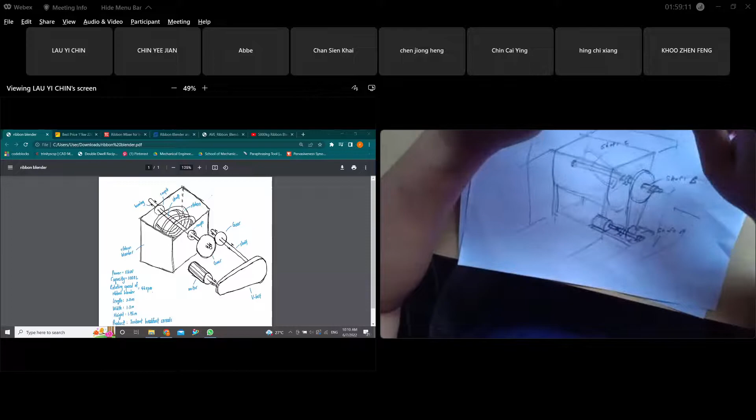So you've got to check that now. Because we need to make sure what we are going to blend and mix - that will define what RPM your machine needs and what type of blade. You said it's spiral and ribbon, right? Using ribbon - okay, so what's the output speed? The output speed is 46 RPM.

Okay. Can you explain to me again what it actually mixes? The product it makes will be instant breakfast cereals, but I'm not sure about the raw materials - I need to check back again. Okay, to make sure.

Is it they are pouring the commercial cereal we buy in the market? No. And we pour it inside? No need, but to me it's not.

That thing is not necessarily this machine, right? It's already raw material, right? So it should be raw material, right? So to do what? You have to know. You not simply just want to do it. You have to know exactly what it is because it will define what type.

The raw material will be poured inside the container. So what kind we know. If you say the standard mixing blade is a ribbon, right? What you call ribbon, is it spiral? I just assume spiral. Ribbon is spiral, yes. Spiral is ribbon.

Your blade that student C will work on, you have student A on the power unit, student B on the middle shaft, on shaft C. Okay, you are using gears, right? Instead of just gears, you have a combination of V-belt and gears. Why?

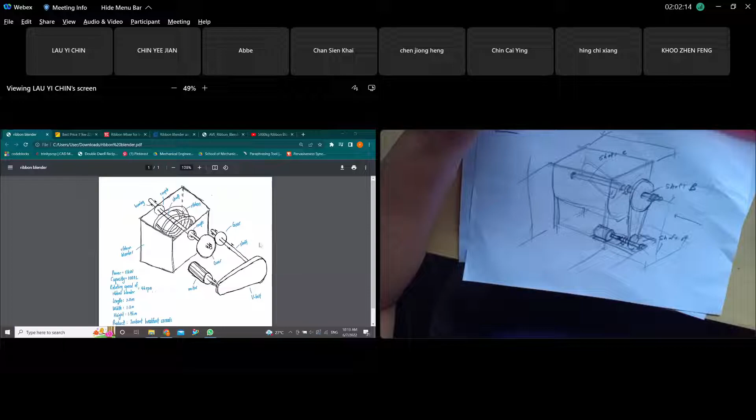You directly mounted on the motor? You mean the small pulley? Yeah, it's mounted on the motor shaft. Is it mounted on the motor shaft? Yes. Can you point me, can you share in the internet, what motor? Is there a picture of the motor you use? I need to see this shaft of the motor.

If the shaft of the motor is so short, that's why you need a coupler, like I mentioned just now for shaft A. You understand that there's a coupler used? I didn't draw it. Yeah, there's a coupler. There will be shaft A, right? At the small pulley. Shaft A, that one is shaft A. It's not the motor shaft. Motor shaft drives the coupler, coupler connected to the motor.

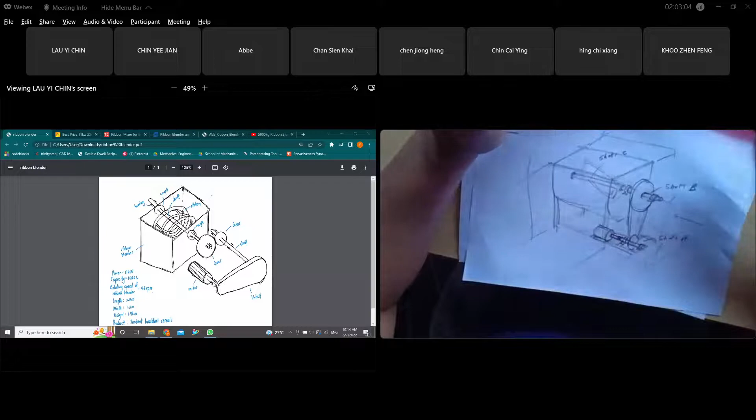Shaft A, student A doing the analysis. But be careful, you have to do detail sketching and location, and not everything must be floating by members. It's not floating. It needs to make sense. It's not floating. Your casing, the ribbon's casing, must have structure.

You need to draw it. Look here, you need to prepare. You need to have a supporting structure like this. This is your mixer unit. This will be the zone of this. At the end, first you sketch like this. Your power unit, transmission unit, you prepare the zone.

So I believe, okay, this is your zone like this. This is the power unit, power unit is here. The one I agree with is your transmission unit, this zone. Understood, doctor. You design, you arrange your zone where, then this. Okay, but normally, I have to tell you frankly, overall size first, that's what you with your group member should determine, take the overall size first.

Because it's quite difficult, later you focus on the content of your machine, then only at the end you want to determine this will be the total machine size. That is totally wrong, you know.

In a design job, when you're using a design project, the customer checks on it. Actually you visit the industry, that's actually the case, guys. You really visit face to face. You visit your client that gives you the project, like food industries, cereal making industries. You visit the company. You are a design consultant. You go there, visit there, you talk to them, they give you some input.

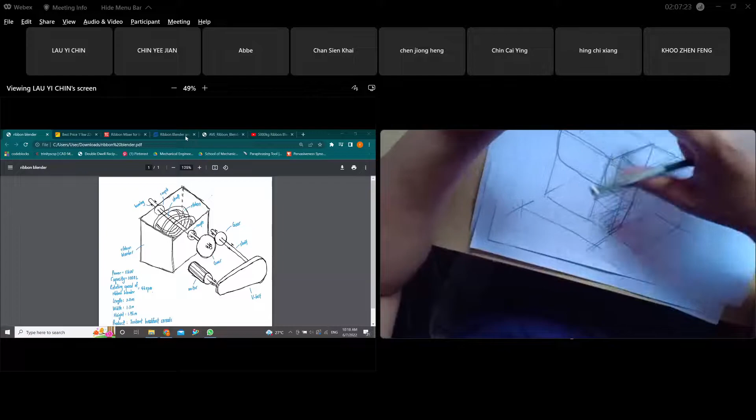That has special kan? Remember you buy Kellogg ada yang special, more expensive, right? The main one is just cornflake. I'm not talking about the chocolate one, not Coco Crunch - Coco Crunch is just one thing. I'm talking about a special cereal for healthy, high fiber, they mix with dry fruit. That's why I believe this is industry, so they need to meet the output of your machine. They already mix that thing to be equally distributed in your container.

But I forgot to tell you guys - you mix output, how you pour it, how you discharge your machine? Even Yee Jian also pour from the top. How do you, if you've mixed it, how do you output from your machine? You understand what I mean? Or discharge, you mean? Yeah, discharge. How do you discharge?

The discharge valve will be put on the bottom of the machine. Okay, you just mention - you don't have to design this thing, all the extra component. No, there is extra thing. You don't have to calculate analysis on that.